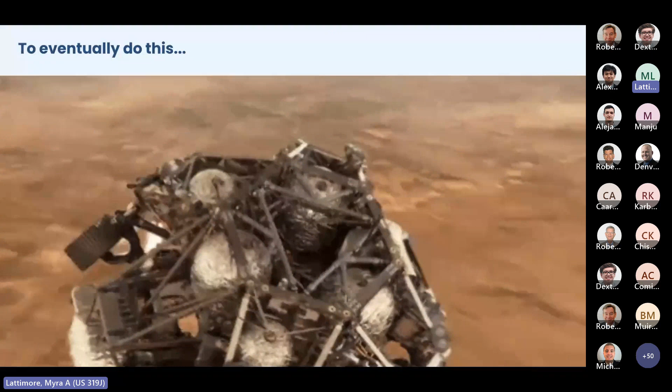Frequently this is done starting with requirements in spreadsheets. And somehow, some way, these requirements ultimately need to translate into this - for example, the final descent of the Perseverance rover on the Martian surface. So we go from spreadsheets and requirements to this, or even flying the Mars helicopter on the surface of Mars. It's a big transformation from those early requirements and spreadsheets to these really amazing technical feats.

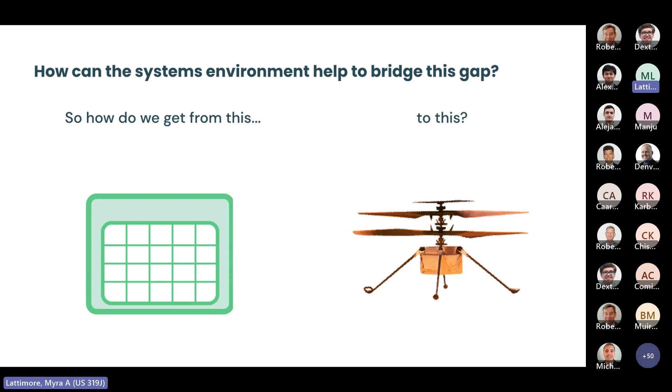And it takes a lot to get us there. The question that we spend a lot of time working with is, how do we go from these simple representations and requirements to something really crazy and complex and amazing at the very end?

It takes a lot of people, a lot of requirements, a lot of spreadsheets, documents, processes, workflows, and tests. And it's pretty messy, honestly. We frequently end up with silos of information that lead to miscommunication and duplicate work. And it really sneaks up on our projects, because so often it starts out so simple and so well scoped.

But engineers work on their models, iterate on their models, enter data into their roll-up, add it to various spreadsheets to track it over time. They may add it to a document, get lots of input from others throughout the course of various meetings. And so the data changes and it gets very complicated very quickly.

We end up in a situation where we have very complex spacecraft with more functions, more hardware, more software, and it becomes difficult to know how a single change impacts the system across the board. It becomes hard to understand relationships between these silos of information - like how to do even maybe a simple thing like check a requirement against a test. And we end up with disconnected areas or implicit relationships that few people really know about or understand.

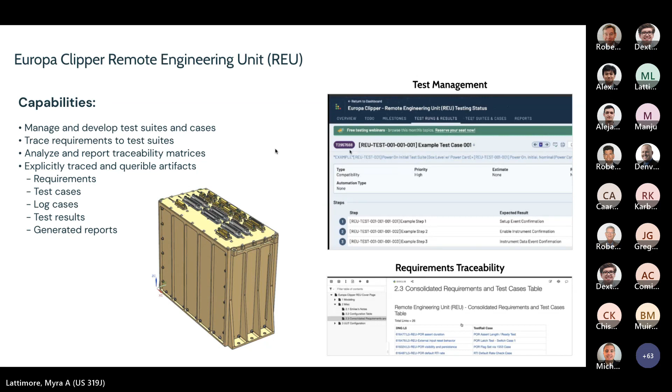So this is one way that they're making sure that data does not become stale over time, that you don't need to manually go and update all the information in your documents, but rather you link it together, and you're able to keep your documents up to date as your requirements data changes.

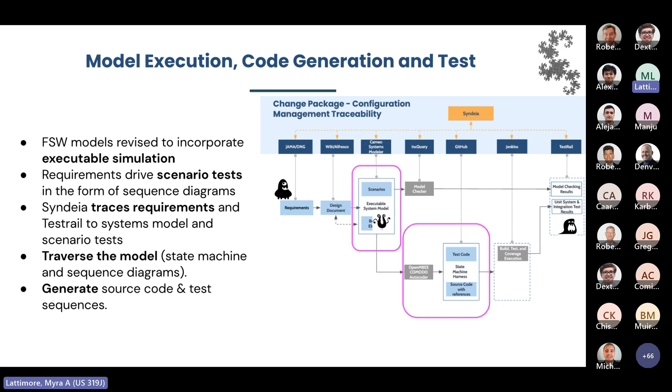So the starting point is this executable model, which is able to generate code as well as the associated test code for the capability, and also produce source code references to the requirements that portion of code addresses.

And the last capability at the end of this pipeline is that we're actually able to generate documentation from the setup. So after generating our code from our models, we also generate the documentation, where those direct references to requirements that are in the source code can essentially be aggregated and create relationships from the requirement repository to the GitHub commit of the source code.

So the relationships between the source code and the requirements could then be added to a report that's included in the code documentation. So overall, an executable model generated code with references to requirements that were explicitly created and generated in a report.

So that's one example of a pipeline. And I believe, based on time, maybe we'll do one last example that's a little bit more focused on early phases of design, so possibly before the point that you have working flight software. This example demonstrates how we might use early phase modeling to aid in the design effort.

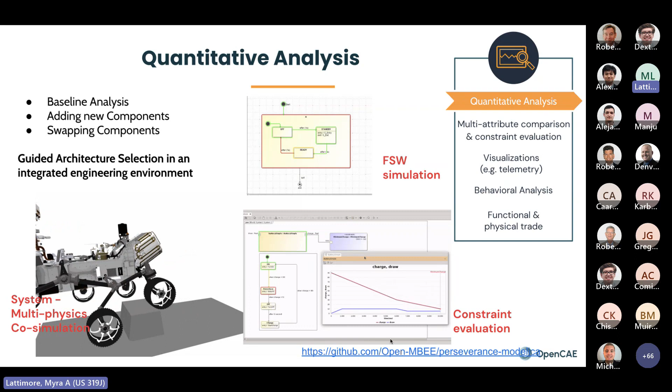Again, very early in the mission life cycle, where we just created these higher level system models that we then want to simulate and execute to better understand our design. Also, fun fact: this rover simulation is open source. If you're into Modelica stuff, you can take a look. But these are just some of the simulation outputs to some of the work that we've done. Obviously, the visual ones look pretty cool, so I like to show them here.

But this, again, is that open source Modelica model of the Mars rover, also of the Mars helicopter, where using some off-the-shelf library components, we were able to create a simple and fairly low fidelity simulation of the Mars rover without too much effort. Pretty pictures.

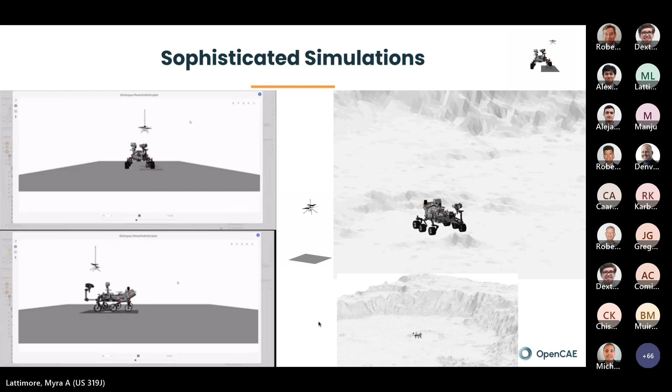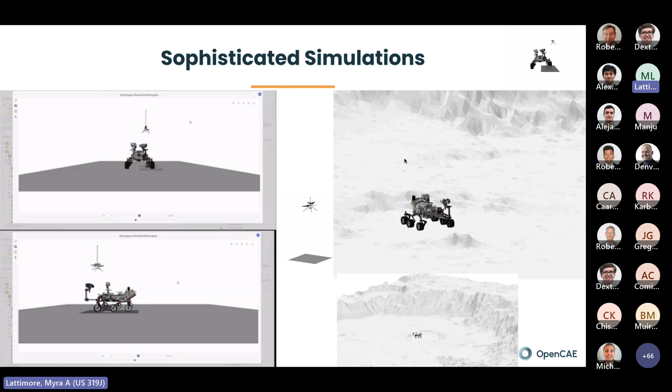Right. Before I move on to the last topic about some enabling technologies, are there any questions? A few more have popped in the chat if you wanted to take a look. So there's one about, does Syndeia also provide interoperability capabilities between specific tools, or is that developed on an as-needed basis?

Myra, can you hear us? You may have dropped off.

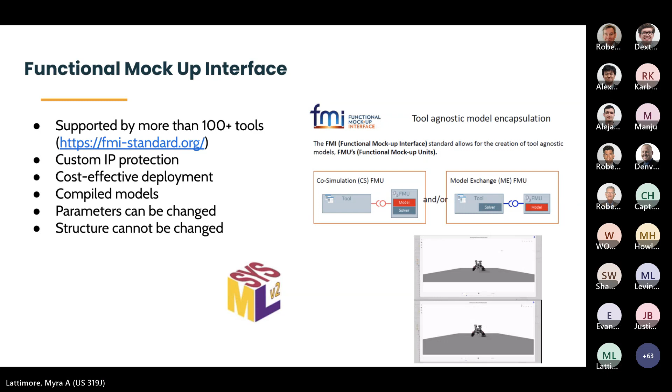Because really what you need is a simulation environment that supports FMUs that conform to the FMI standard. And then you can treat your models like Lego blocks and plug and play them because of this standard interface. So FMI is another enabling technology that we're looking to better leverage for some of our modeling efforts.

And I think lastly, packaging capabilities and distributed capabilities like Conda are one of the key enablers for our vision. So being able to specify your dependencies and create packages of your models and distribute them as self-contained packages that then lend themselves well for reuse is another capability that we think will enable our vision.

So last slide, we always joke about what the next generation systems engineer dream car looks like. Well, it has Jupyter as the engine and open source as the framework, and things like Conda, FMI, and SysML v2 and Modelica as some of the wheels and features. So that's just a little bit about some of the technologies that we think are really going to drive our push towards model-based product development. All right, with that, I think we can take some more questions.

Great, thank you so much, Myra. So there are a few questions in the chat, a lot of them having to do with the tools. So Michael asks, can you say where you got the tools needed to implement SysML v2? Yeah, so good question. So we don't fully have a SysML v2 tool just yet. We do have a service called SimCenter Studio, which has a proprietary language, which is very similar to SysML v2 right now, and I've been told will hopefully evolve into SysML v2. So we're not quite there yet.

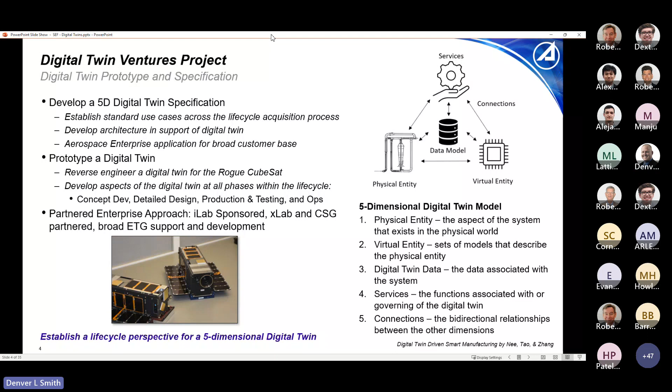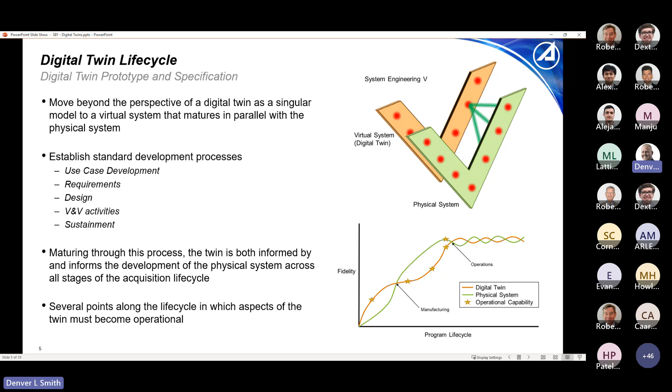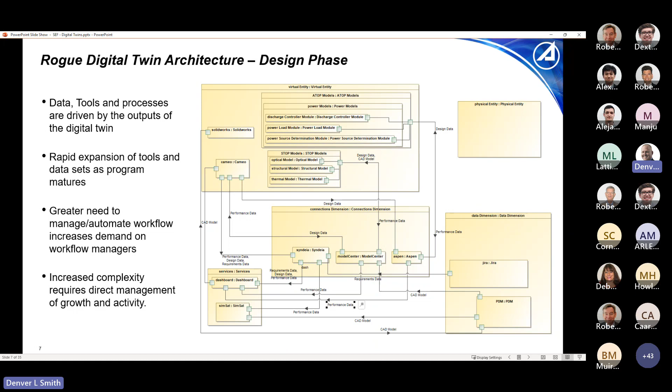Now, if we start to look at this as you transition out of this design phase and you start to move more towards the manufacturing phase, you're going to see explosive growth in the physical entity. You're seeing test data coming out of it. You're seeing manufacturing data coming out of it. You're seeing a tremendous amount more complexity being developed as well. And so this is why we're approaching it with this framework perspective as a way to manage the complexity of this growing digital twin, this virtual system, as we mature through the program.

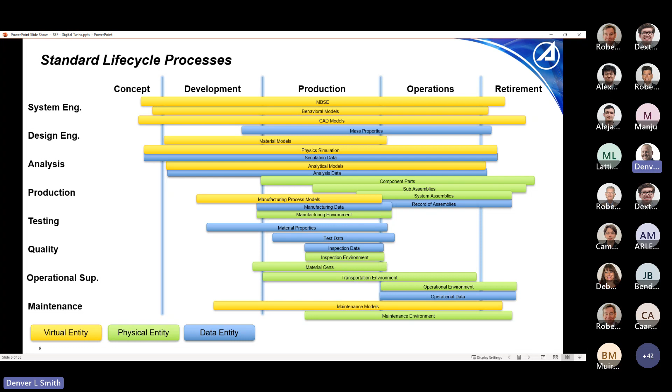As we approach it with the digital twin, what we start to do is identify functional capabilities that we want. Maybe I want a state of health dashboard, or integrated V&V activities, or HIL/SIL, or maybe I want to explore certain operational approaches or parameters later in its life cycle. So I identify the capability, and then I have to identify what data, what models, what physical system information I need to pull together. We go through and identify those needed entities, and then build out our connections.

Let's say we're doing the state of health dashboard. I need to pull in from my record of assemblies, my inspection data, my operational data, my maintenance models. I'm pulling all that together, connecting it, and getting an emergence, a new dashboard that tells me new information I haven't had before. I'm pulling in operational data and physics simulation, tying that back into my assemblies, giving myself new predictive capabilities for operational exploration. So we're seeing this approach where you identify the use cases, identify what exists within your current programs or processes, and connect it together to have this emergence of a new capability.

One thing I will say is that while within the virtual, physical, and data entity, 90% of what we need already exists, oftentimes it doesn't exist in the format we need. I may have power models that provide a physics simulation, but when trying to make this connection and pull it into operational exploration, I may find the way I developed my power models isn't conducive to that connection. They can't speak to the process. So there's a decent amount of non-recurring engineering investment needed to take some existing capabilities, rethink the way we do them, and provide them in a format more conducive to integration.

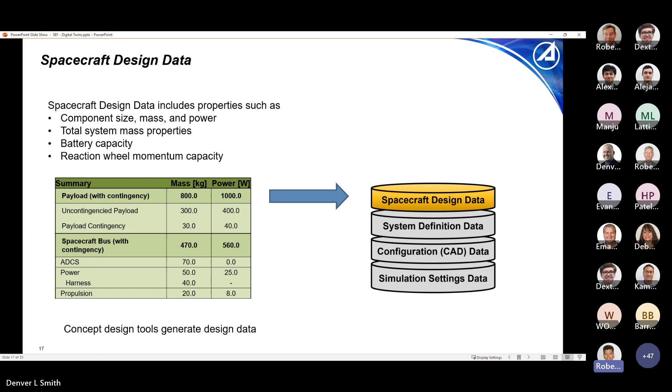Another type of data is system definition data, which is often captured in SysML type tools. If I want to capture the logical behavior of some element of my system, for instance fault logic or attitude control, one way to capture that more rigorously is in a SysML model shown there as a state machine. You can see the different states and state transitions.

How do I capture that data for use in my SimSat environment? I can break those state machines down into their key attributes, such as the states, and capture the different activities going on while the system is in that state, and then define those state transitions. If I break it down that way, I can capture the system definition data. So anytime I want to run a simulation, whether for one satellite or a number of satellites using that same type of logical control, I can pull it straight from that data source, using an authoritative source of data so I can pull it out in the future or link it to other elements of my system.

If I'm trying to verify system activities, say further downstream in the life cycle, I can pull the data straight from the source. In this way, it provides more or less a digital thread that connects my data together with other tools and models.

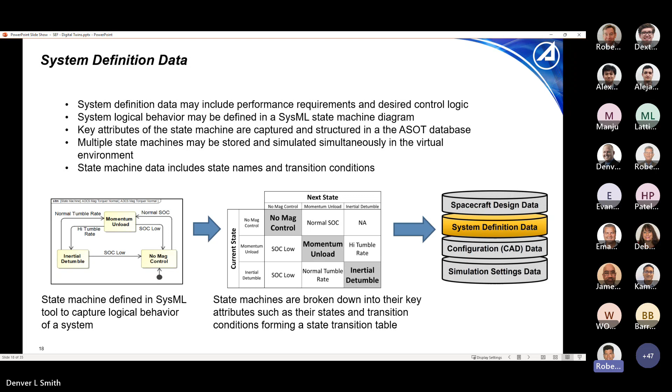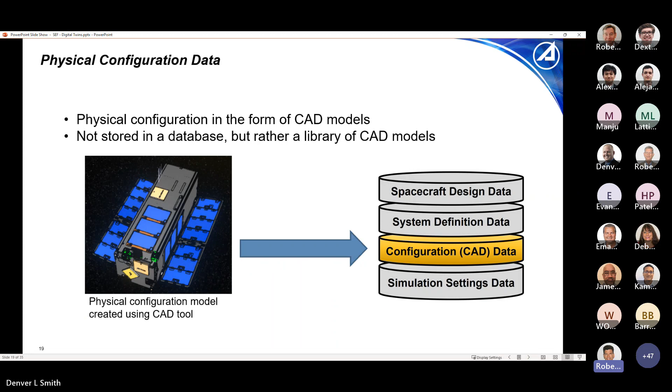And then simulation settings. This will capture the settings that I do for any given run of the simulation. So if I want to use that for verification data downstream, say verifying requirements through analysis, I can pull up the sim data and rerun any sim that I want with that captured data.

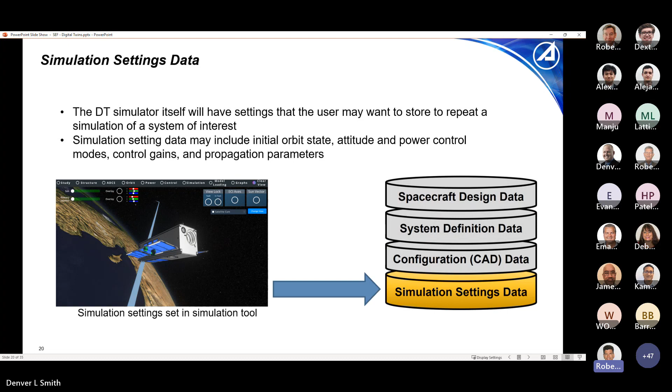So what we want to do is build in hooks to allow us to link into the data in future life cycle phases. Once we have an actual physical system—not all of our concepts become physical systems, but some do—we want to build in hooks that allow us to update our model and data based on real telemetry. So I mentioned that example of the ballistic coefficient: if I put a hook in my digital twin model to accept a ballistic coefficient once that data becomes available through TLE or any other source, it'll automatically update whenever I get that new information, updating my digital twin model. So those are some important things to think about when you're building a digital twin. For concept development, you have to think about future life cycle phases as you do that.

So I'd like to summarize before I turn it back over to Denver. It's a digital twin that we want to build for spacecraft concepts in a virtual space and environment. We'll verify design requirements, and it enables a holistic analysis of both the logical control and the physics-based behaviors.

So you're linking together different models and tools, all connected by the same data sources. The data necessary to run the simulation are generated by the different tools. As I showed you in that picture showing the different hockey pucks stacked on top of each other, each had a different generating source. That was the authoritative model used to push the data in there. But once the data is captured in there, any of the other tools throughout your organization, whoever has access to that data, can pull it out.

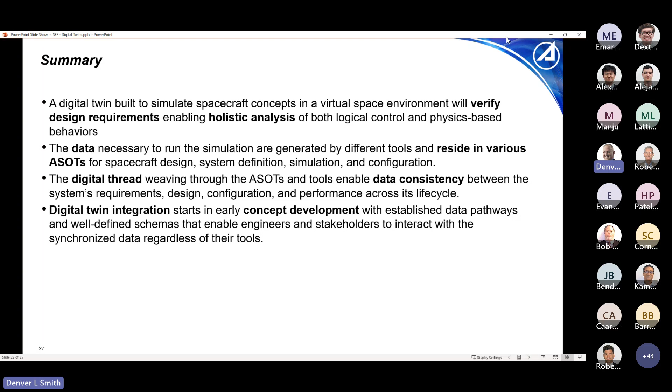All right, so Aspen is an integrated simulation approach, but maybe it's better to say a federated simulation approach or an integrated set of federates to do space vehicle modeling and simulation. So this presentation is going to be mostly focused on the mod and sim aspect of digital twins. There's obviously many other aspects like connections back to requirements, post-processing all of that data, all of these kind of other systems engineering disciplines. But right now with this Aspen project in particular, we're really focused on that kind of federated modeling and simulation approach.

So our goal with this project is essentially to create an environment where we can virtually fly out a simulated satellite. This could include various ConOps, design reference missions, but really what we want to try and do is create a generalized environment and framework where we can do all sorts of various modeling and simulation for any of our customers. And so that could include a large Class A mission in geosynchronous orbit, or it could be a more complex, potentially multiple satellite mission in low Earth orbit, among other customers that we have.

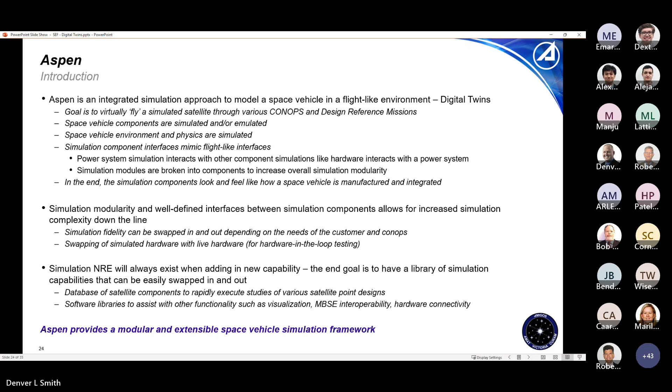So what we're basically trying to do here is, as I said, give our customers a way to virtually fly out their missions and enable different outcomes from those simulations. We want to be able to verify and validate various designs of missions, because part of our business in this industry is making sure that various acquisition programs are being built properly throughout that acquisition life cycle. We want to explore various DRMs, and we basically just want to support a large variety of customer questions.

And as I said, that could be a traditional space problem, or it could be some of these newer problems where we start talking about things like rendezvous and proximity operations, in-space assembly and manufacturing, and all variety of edge processing, AI, autonomy. And so as a part of developing this capability, not only do we want to support things like digital twins, but we want to have this flexible framework where we can model and simulate all types of different components and situations with these missions. So if we go to the next slide.

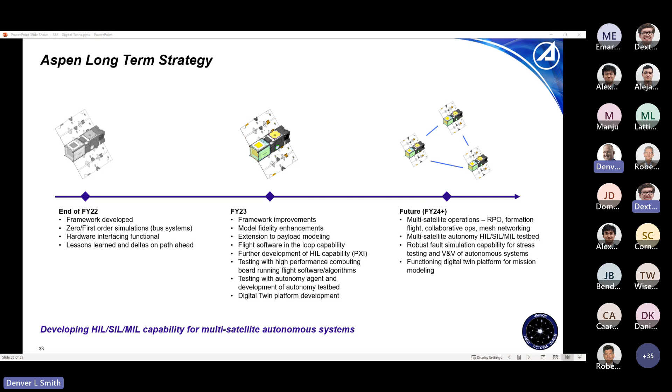Great, thank you guys. I don't see anything in the comments. Okay, does your MBSE model capture these additional connections? Is a question by Timothy. So yes, we are working our MBSE model to connect across all of these. And so if we may have a quick view of it up here. Let me see if we could get there. So you can see where our MBSE model, we generally use Cameo here.

A lot of times we're trying to identify, okay, where does the ASOT reside? Does the ASOT reside within the MBSE model? Does it reside somewhere else? And how are we pushing that data back and forth? So we're identifying, Aspen's a great example of that right now. So we're using Aspen to federate our power models, and we're identifying where do the parameters associated with those power models reside. And a lot of them reside in Cameo.

So parameters around the battery or the solar panels or the reaction wheels and things like that, those exist here in the Cameo model, and they become inputs into the Aspen simulation that is integrating all those power models together. So yeah, we are building out connections across our MBSE model to the broader virtual system.

Looks like there was another question. Yeah, how do you resolve ASOT struggles? That's an excellent one, and is one of the big challenges that we've seen here. And it's not even just ASOTs. Sometimes it's just coming to commonality on what we call parts and components. So for the ACOM model that Dexter referenced, the Amigos Common Object Model, when you're bringing in different domains, they